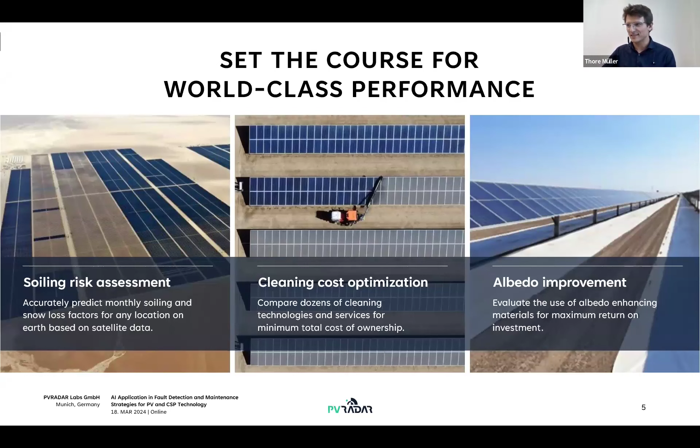Right. So just in a nutshell, what can you expect when working with us? The deliverables linked to our first topic, the soiling risk estimation, are reports for a specific location. You can request a report for a new location that you're interested in. What you get is a report that contains our methodology, the data that was used, the justification, but most importantly, 12 accurate monthly average numbers for the average soiling losses that you can expect at that location, which you can then feed into your PVsyst to get a much better estimate of the soiling you would have to expect at that location, instead of using maybe 2%, the standard value from PVsyst itself.

Now, once you know what the kind of soiling problem is, you would like to do something about it, and then you can get a license for PVRADAR online or the PVRADAR platform, with which you can optimize the cleaning for that location, and therefore bring down the soiling losses and the 12-monthly soiling loss factors to a much lower level, but of course at the expense of cleaning. And there we make sure that this cleaning is as little as you need, as little as possible, as cheap as possible.

What you can also use this for is if, for example, you have a new power plant and you have to select a cleaning technology. Maybe you want to buy a tractor, and there are many different offers, and it's very difficult to compare apples with apples. But our software helps to decide how much more, for example, would you be willing to pay for a cleaning technology that has a slightly higher cleaning efficiency, and how to compare a tractor maybe against a cleaning robot that works very differently, where the comparison is not that easy and you cannot just go by price.

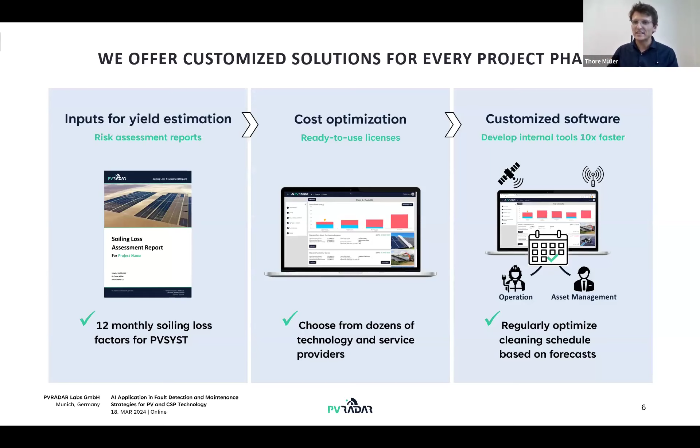All right. Now, the more technical part of the presentation. Why is it important to assess soiling and optimize cleaning during the design phase? That I would like to explain with a little comparison. So let's assume we are in the early design of a power plant. What I would like to show is what can go wrong if you don't, and then of course what we can improve upon. So let's say we are a project developer working on a new project in Morocco, and unfortunately, for that very location, there are no measurements available, and also there's no time.

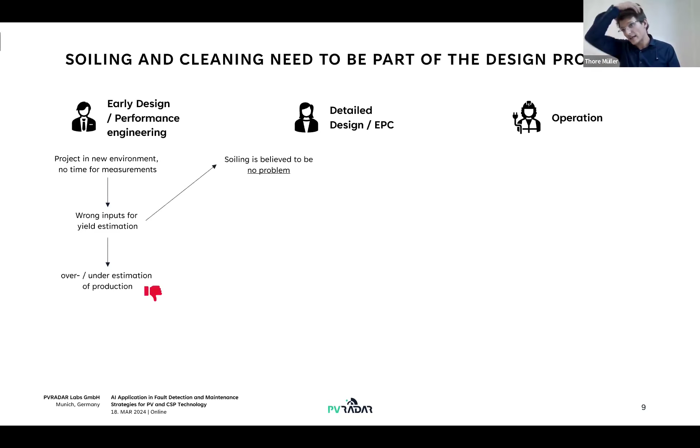And that might lead to underestimating of the production, but very often what happens is that people take a number that is too low, and therefore in the end, what happens, what I started my presentation with, the plant performs less well than was expected beforehand. Right, so that is during the very early design.

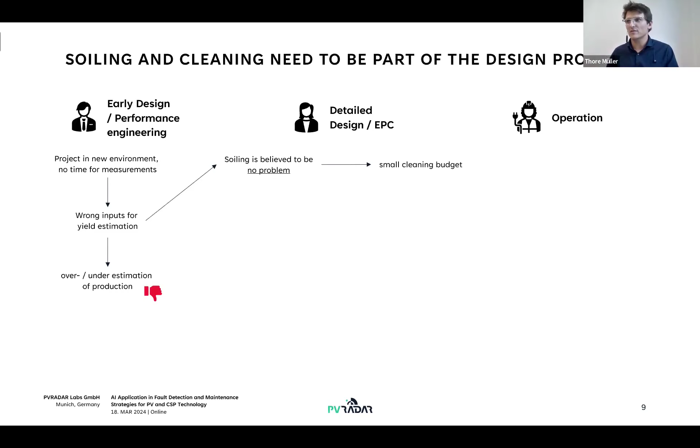Now let's say the power plant moves one step further, and we are already basing our expectations on wrong assumptions. But now our EPC team needs to incorporate a cleaning strategy into the design. They may think that there is no problem. Therefore, a very small cleaning budget is associated to the plant, and then people in operation later find it very difficult with a very small budget to maintain the high expected performance of the power plant. And that, of course, is a problem, because at that point, many of the options that you had during design are already gone.

Alternatively, the EPC might also think that soiling is a very big problem, where in reality it is not. Happens less often, but may happen as well. Well, the intent is there to incorporate a cleaning technology into their designs, and then you would get quotes from many different cleaning providers and find out that prices are very different, and it would be difficult to make a decision. And you might end up just going for the cheapest one, because prices are of course easy to compare, but not necessarily the best quality, and that can again lead to problems later on.

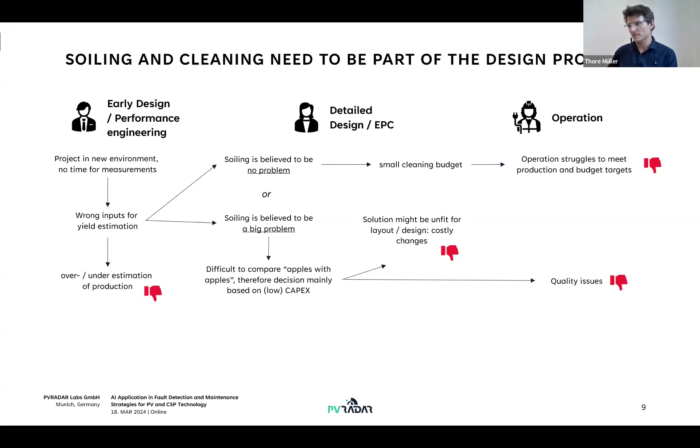So what is the solution? The solution is to incorporate data as early as possible, and therefore be able to make data-driven decisions. Again, I know I repeat myself, but it's something that I learned the hard way. It's important to start as early as possible to avoid very costly reiterations. The later the design needs to be changed, the more costly it is. And once it's in operation, changes, even adding a cleaning system, might be very difficult.

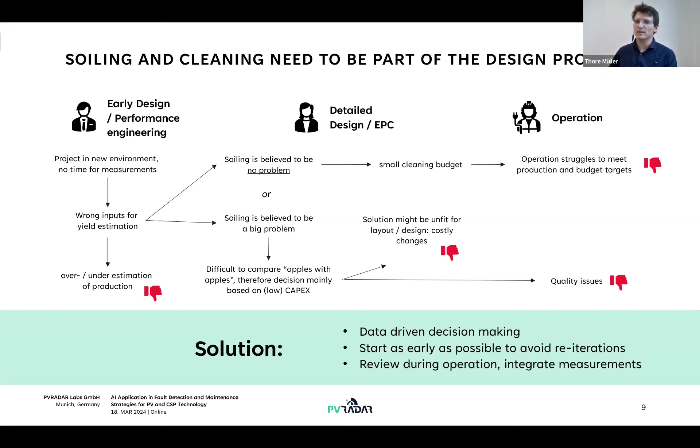And then, of course, once the power plant is being built, you have a good estimation, for example, provided by us. But then during the operations, you still want to measure soiling, you still want to have an open eye for it, and then fine-tune your cleaning strategy during operation. That might still bring benefits.

Okay, so how do we help our customers achieve this? We do this with three different solutions. Well, I already mentioned them. We have the soiling report that gives you the soiling loss factor, along with very detailed documentation that you can add to the project documentation, share with banks, share with shareholders, and it gives a lot of transparency and a lot of credibility to the project.

We help with our software. It is possible to make a holistic techno-economic optimization of the cleaning strategy for that power plant, and to determine which technology is the best and also which cleaning frequency is the most cost efficient. And then the solution that we're building for operation helps to fine-tune that and really decide case by case, year by year. Okay, in this case it rained a little bit more than last year, so we will do the cleaning a little bit later, and that still gives a little bit of a benefit.

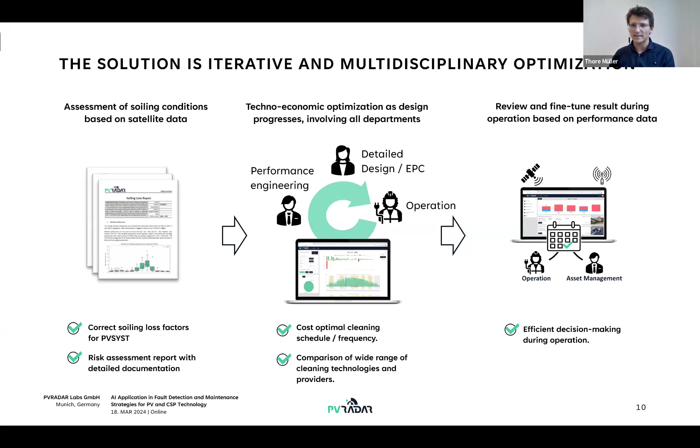All right. With that, let's jump into a little bit more of the theory behind and the underlying models. I will go through the process of doing the soiling assessment and the cleaning optimization theoretically once, and then at the end I will show you some examples of results. So how can data, algorithms, and AI help us to solve this problem? Just to make sure that this is very well understood.

Okay, so what is the theoretical problem? What we want to do is make a cost optimization in the end, to find the optimal cleaning strategy. And the optimal cleaning strategy is the kind and number of cleanings that brings down the total cost, which is the sum of the cleaning cost and the energy loss. If I clean every day, that is optimal in the sense that the power plant is never dirty, but of course that might be way too expensive. Most likely it is. And then there's the other extreme where I never clean.

That doesn't cost me much, but also there will be a lot of soiling losses. So the optimum is somewhere in between, and where exactly that optimum is depends on the soiling conditions, the meteorological conditions, irradiance, first and foremost the PV plant technical design, of course, the market environment, at what energy sales price am I selling my energy? Then the parameters of the cleaning technology and the cleaning cost for the cleaning strategy that I have chosen.

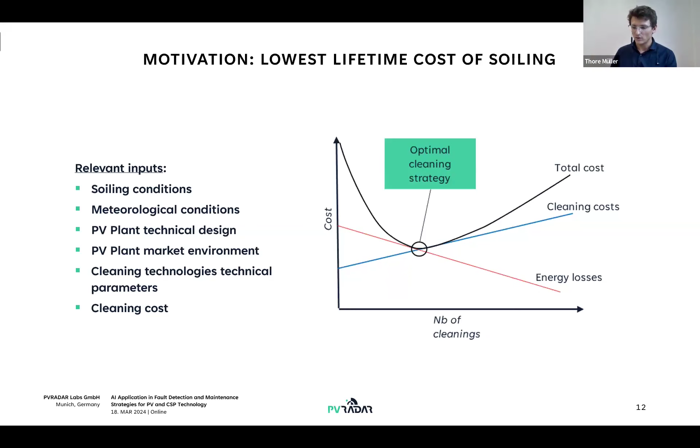And in our software, one is able to input all of these inputs, and the rest, which one can't input, are derived by our machine learning algorithms. Right. So how does it look like? What are the steps in our solution? So the first step, you would have to select the project location and define the design. Of course, depending on the location, if we're in the middle of the desert or in a more temperate place, soiling may be very different.

For example, what we have seen in power plants in dry and arid places, for example in Morocco, I would assume, there's a lot of mineral dust in the air, which means that the soiling does accumulate rapidly, but once there's a rain, it kind of gets rid of the soiling again, leaving the modules more or less clean.

Whereas in places where you would not think of soiling as being one of the biggest problems in the first year, for example in Germany, where I live, it happens that soiling builds up very slowly year after year. There's a layer of very sticky plant material building up on the modules that even though it rains, it never really goes away, and you can only clean it away with mechanical cleaning. And therefore, this is very well defined by the location, and also the plant parameters, tilt angle, and so forth.

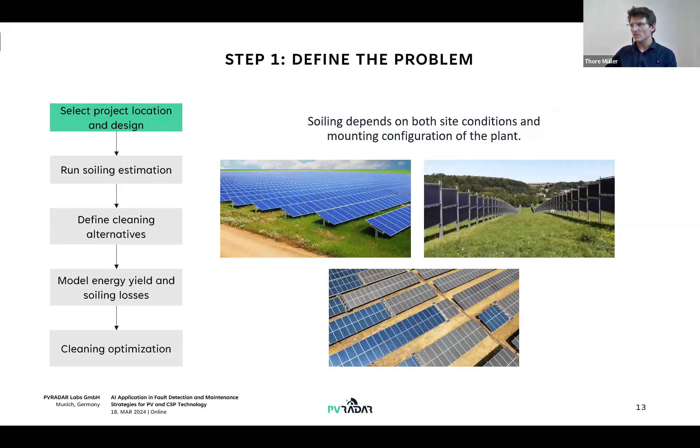Now, for that location and for that technical design, we run a soiling estimation on the basis of historic data. So we collect from different sources meteorological data, the ambient temperature, wind speed and direction, humidity. Most importantly, we fetch 20 years of historic concentration for different components, particles suspended in the air, for the very location. And also we fetch information about the rainfall that this region has seen. All of this we combine in our soiling estimation model to get a historic soiling profile. I will show an example of how that looks at the end.

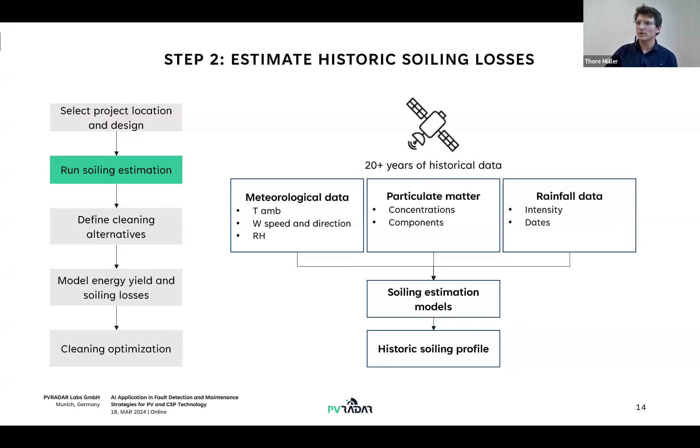With the soiling profile at hand, once we know what the soiling problem is, we now would like to compare different cleaning technologies. So a user in our software has to select the different cleaning technologies that one would like to see in the comparison. What the software is capable of simulating is cleaning robots, dry and wet, cleaning tractors, also dry and wet. There's fully autonomous cleaning robots, manual cleaning.

And all of these systems are described with their lifetime, the lifetime of different components. Of course, if you clean more, your brush will be worn out sooner, and then you have to replace the brush. All of these costs and implications are considered in our software. You need to have the cost, the operational parameters, and of course the cleaning performance, most importantly the cleaning efficiency. We offer a database of available cleaning systems, but users are always able to fine-tune every single value if you think you have a better estimate, or would like to find out what happens if the cleaning efficiency was a little bit higher or lower. You immediately get the impact on the total cost of ownership of that system.

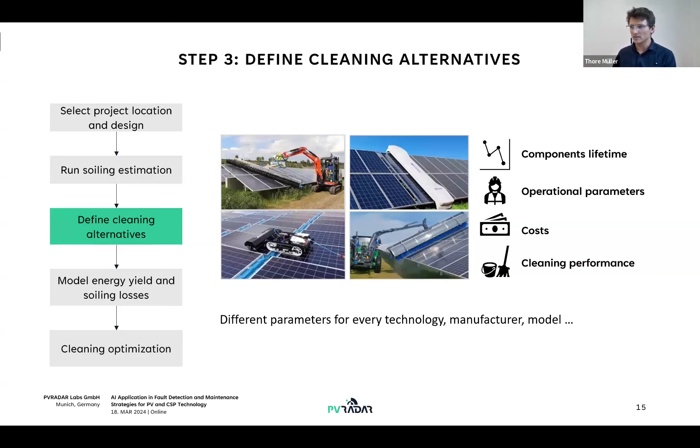What we're also experimenting with is including other mitigation strategies than cleaning. For example, anti-soiling coatings could also be modeled, but that is a feature still under development. If you're interested, we can talk about that as well. Right. So we have to define the system. We have to find the historic soiling conditions. We have to find what kind of cleaning is available to us. And now we want to make a long-term forecast, 20 years into the future, to find out what will be the optimal cleaning strategy.

And this is where machine learning techniques and AI come into play. And here, I don't have much time to go into detail, but there are basically two approaches: a data-driven approach in AI and a more physics or model physics-based approach. And we're in favor of the latter, as we think that AI is great on certain occasions, but still it is necessary to make sure that the outputs of that model satisfy physical reasoning and are physically possible, and we make sure of that with that approach.

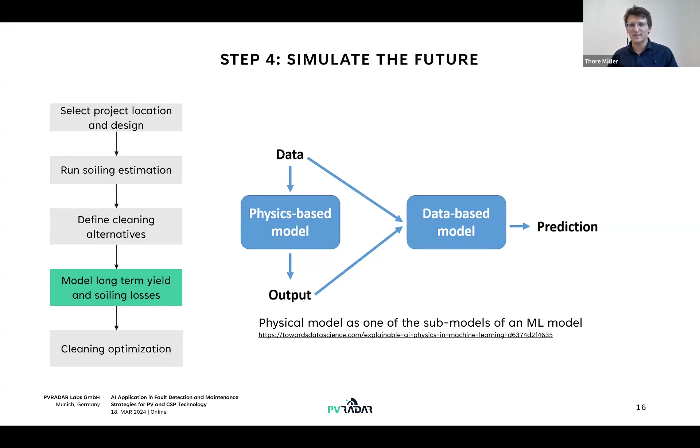Finally, so again, where are we now? We now have our estimation of the soiling conditions in the future, and what we do now is we test the different cleaning technologies, different cleaning packages that have been selected. We find out what is the optimal number of systems, what is the optimal number of cleanings, what is the optimal date at which it needs to be cleaned, and that of course can be different in every year. And the result is a total cost of ownership for each of the alternatives.

You see at the bottom the stacked bar plot. In red is the soiling cost. So even though you're cleaning, because you cannot clean every day, there will still be some residual soiling losses, which have a cost. And then in blue is the actual cost paid for the cleaning. And of course, you have to consider both.

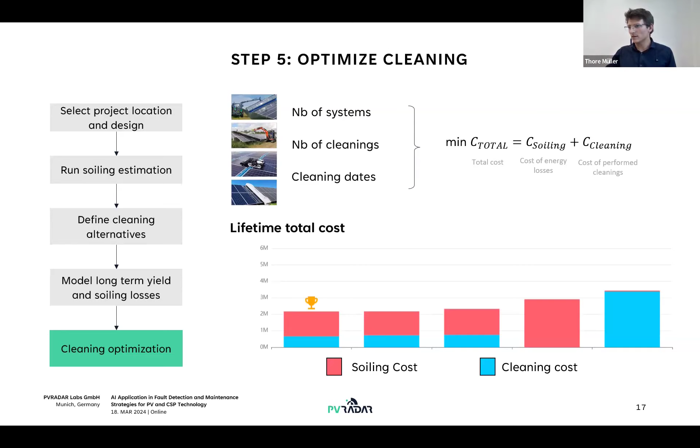And we find in red the scenario where you do not clean, you never clean. We find that that is our base case. And then in this example, there would be 3 systems that are better than never cleaning, and 1 that is actually worse, more expensive than not cleaning. Again, this is an example. And speaking of examples, now let's jump into some of the results.

I lost track. Oh, I think I'm a little bit over time. Sorry for that. Well, yeah.

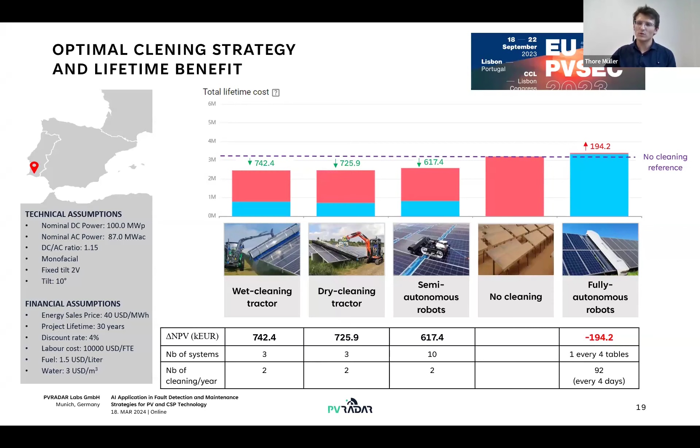So here's an example for a power plant in Portugal, where I think the results that you have seen before are from that power plant. What you can read from this is that for this power plant, the scenario of no cleaning is actually not the best one, and you would like to clean regularly. The best that we found was a wet cleaning tractor, 3 systems with an average of 2 cleanings per year, which would increase the net present value of the project by 742,000 euros. Yeah, so a considerable, nice improvement that you would like to take. These were results that we presented at the EU PVSEC last year.

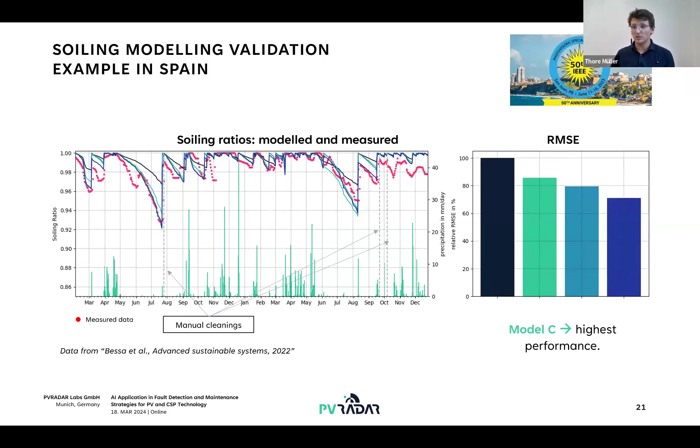Finally, I can show you a comparison of different models and validation data. So we compared our prediction models with measurements for a site in Spain, and you can see there are 4 different variations. We were experimenting a little bit with different algorithms, different models, and you can see that by tweaking the input parameters of the model, which is something done by AI as well, by our methods, we can have quite a good fit, not a perfect fit, but quite a good fit, and a much better fit than one would have guessed without any knowledge, which is unfortunately very often the case.